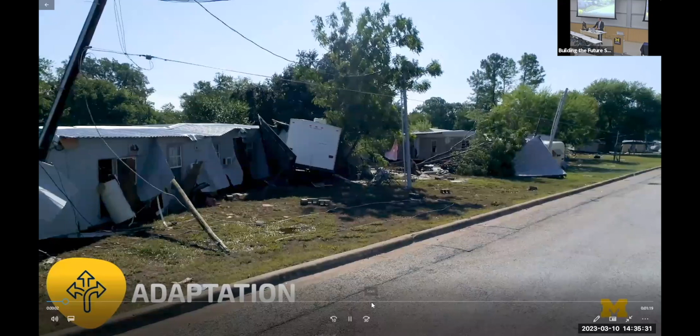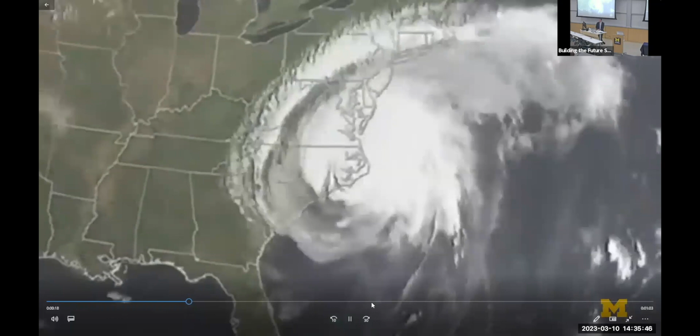Adaptation is a necessary thing for survival. We're dealing with many things that are affecting our life. Climate change is essentially raising sea levels, and that's going to affect coastal communities. It will cause more severe storms, more severe hurricanes, and tornadoes that are becoming increasingly frequent and increasingly destructive. We are looking at how extreme events like hurricanes and earthquakes affect communities, and how these communities can recover quickly from these different types of events.

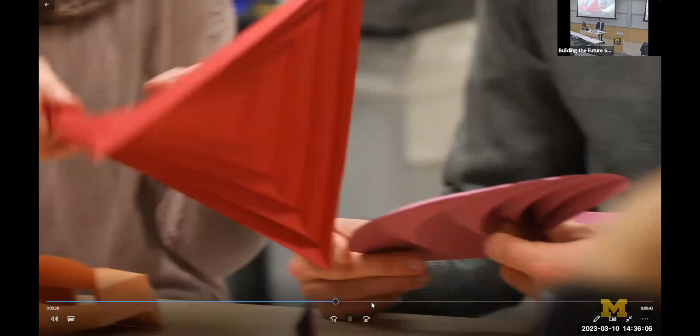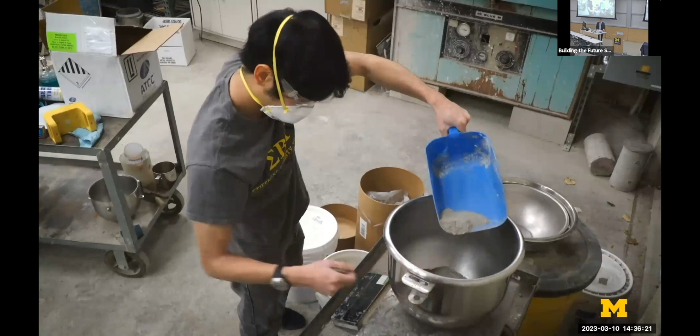My colleague Evgeny Filipov is looking at how origami can help us design structures that change shape, that respond to various types of hazards as they occur. My colleague Valery Ivanov is looking in the Amazon at how trees interact together and how they grow within that environment. My work is focused a lot on earthquake engineering. If we do not build our structures to be resistant to earthquakes, we are going to get structures that would fail in a catastrophic manner.

We will always be adapting to new stressors that will appear on the horizon. We just don't know what they are yet. Through human ingenuity, we will always be able to adapt to whatever situation exists.

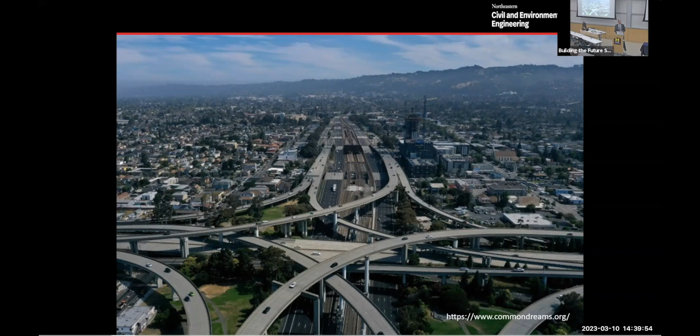It's a time when we're looking at the types of decisions we've made over the years in civil and structural engineering, starting to think about social equity, social justice, and whole new ways of framing our decisions and their impact on our designs. We have 60% of the world living in fragile coastal communities that are increasingly affected by climate change, and as structural engineers, we're thinking increasingly and directly about the environment and its influence on our designs.

Some of this has been captured by the American Society of Civil Engineers in their recent Future World Vision, led by Jerry Buckwalter. He said, change is coming, and it's on a scale that can really drive confusion and dysfunction unless our profession is ready to address these new realities head on.

But it's an exciting time. You could see some of the topics that the Future World Vision addresses related to smart cities, high-tech construction, advanced materials—so much of this starting to influence how we think.

I've been able to go to Kobe, Japan over the years several times. It's a beautiful city in central Japan, which along with Kyoto and Osaka forms a triumvirate of cities that are an economic hub. Kobe is one of the most important cities in the history of Japan. When I go, I stay at the Portopia Hotel and can overlook the port facility and see the activity.

However, the city was highly impacted in January 1995 by the Kobe earthquake. This was an earthquake on the high side of a moderate earthquake, certainly not the big one, but fire raged throughout the city from gas explosions. Japan is perhaps the most seismically prepared country in the world, yet they had some significant collapses in their buildings. Transportation infrastructure was heavily impacted, but most importantly, the port facility was basically wiped out by the earthquake.

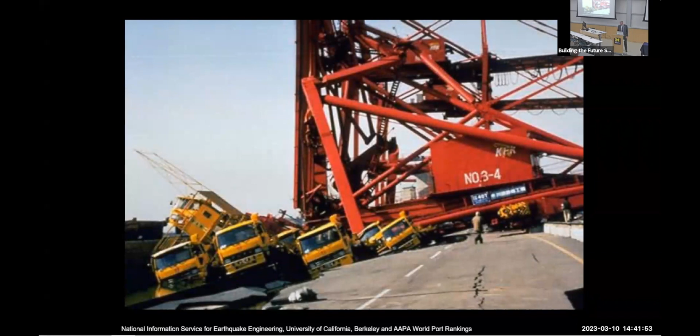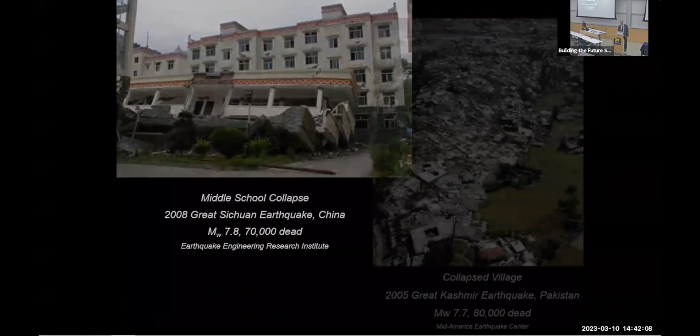And of course, we see this over and over again: 2008 in China, 70,000 dead; 2005 in Pakistan, whole villages leveled to the ground; 1976 in China, hundreds of thousands dead, often from lightly reinforced concrete and masonry.

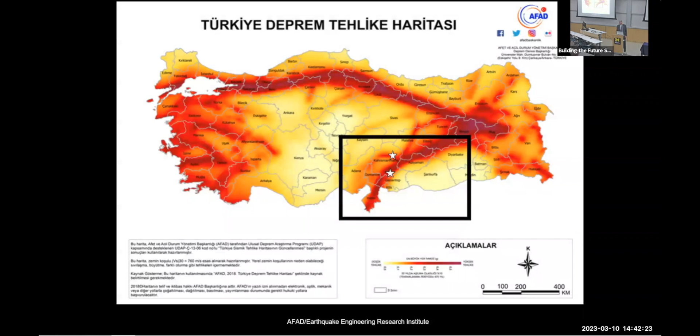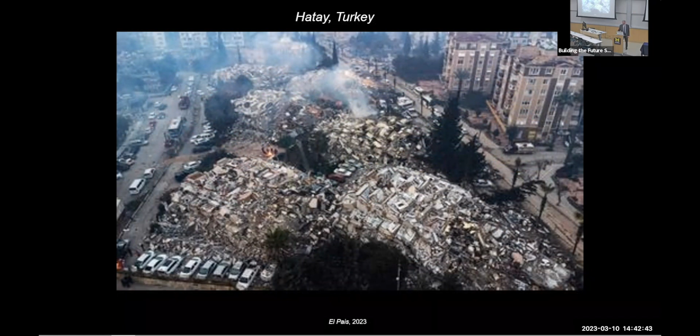But these are not just issues of the past. Just a few weeks ago, the East Anatolian Fault in Turkey had several ruptures. We're seeing here not only the impact of vulnerabilities from lightly reinforced concrete and masonry, but also the impact of corruption that can occur in our profession. We'd like to think it doesn't occur much in the United States, but if we look at what's happening around the world, we still have a long way to go.

Japan is so well prepared, and yet you look at 2011 with the impact of the tsunami on the Fukushima nuclear power plant, and that whole region is still struggling to recover.

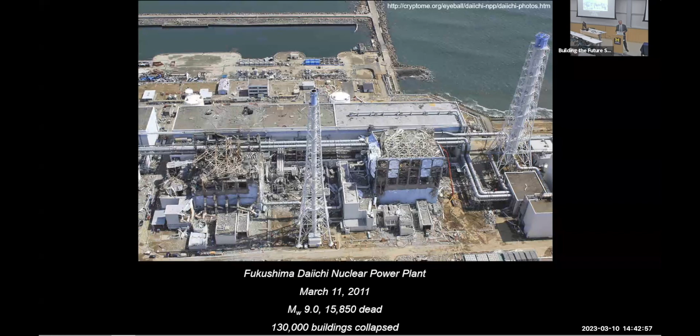In the structural engineering world, we have a term called disproportionate collapse, where we speak about damage or collapse that occurs to our structures disproportionately to the amount of load. This was perhaps first discussed with the Ronan Point collapse due to a gas explosion, as we see here.

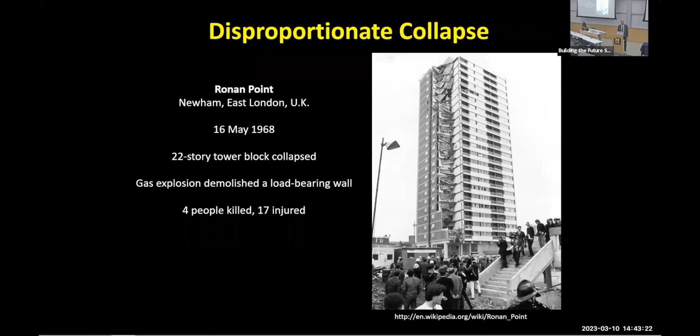But the term really wasn't thought about too much for several decades until 9/11. I think most engineers would agree that the collapses here were not disproportionate to the loads. But increasingly, we started thinking much more directly about collapse simulation, modeling collapse, and thinking about the impact of collapse on whole regions.

You can also talk about disproportionate collapse of a region, and Hurricane Katrina in 2005 provides a clear example, where the failures that occurred in the levees wiped out whole populations and neighborhoods in New Orleans that really still have not recovered adequately.

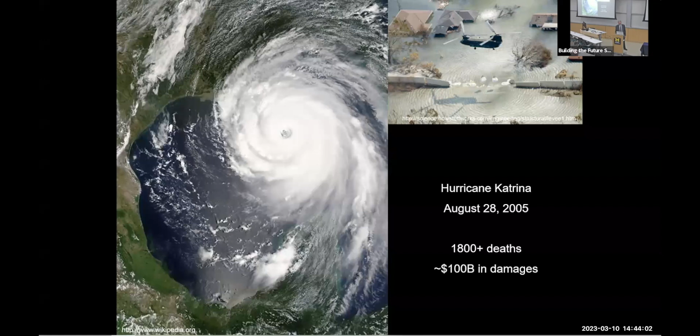Kobe was the 6th largest port in the world at the time of the 1995 earthquake, and I visited over the years following that, and it still struggled to recover. A lot of the shipping lines at that port, which was largely a through port, redirected to other ports and formed new relationships. Much of that economy never came back.

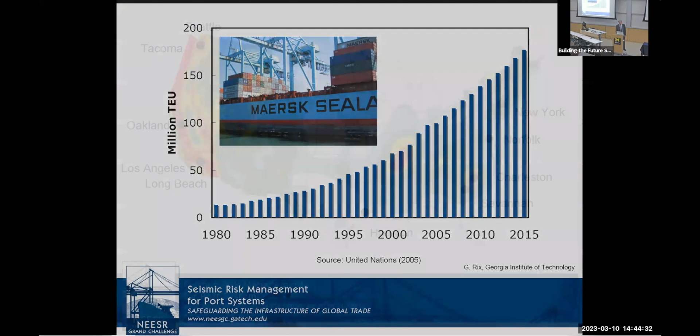This is not just impacting the rest of the world. High seismic zones and high hurricane zones in this country still have vulnerabilities, certainly out on the West Coast. Just last week, the president of the Earthquake Engineering Research Institute, with support from other professional organizations, went to the governor of California and pointed out clearly that the types of failures we saw a few weeks ago in Turkey can absolutely still happen in California.

They've been making great progress retrofitting schools, hospitals, bridges, and other critical facilities. Some cities or counties have laws on the books to try to upgrade privately owned structures like apartment buildings and such, but it's taking decades and we have a long way to go. These vulnerabilities are still there.

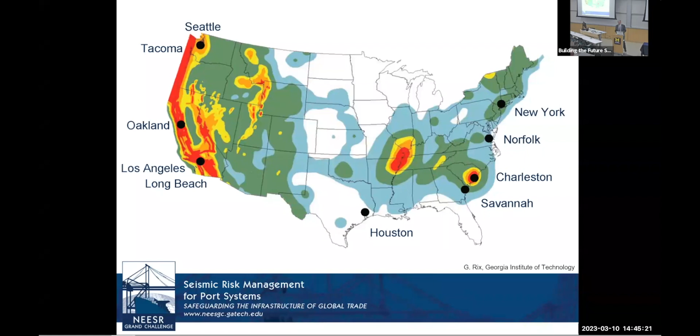So Kobe was a through port. What do we do with a port like Los Angeles and Long Beach? This is a destination port for a huge amount of the goods that come into the United States. If we have a major earthquake in Southern California, the impact on this country can be lasting for a long time.

We saw something like Superstorm Sandy, which hit New York and New Jersey quite hard, and the recovery was fairly quick. But I think we need to step back and ask ourselves, what does it mean to be resilient? How do we develop systems that can bounce back quickly from extreme events?

Simultaneously, I think we have an imperative to really be leaders driving sustainability in the built environment. Construction and use of buildings takes about 40% of all energy use, about 40% of all material resource consumption, about 40% of all waste production, and about 40% of all greenhouse gases. The transportation sector accounts for another 30% of energy use, and the industry sector the remaining 30%.

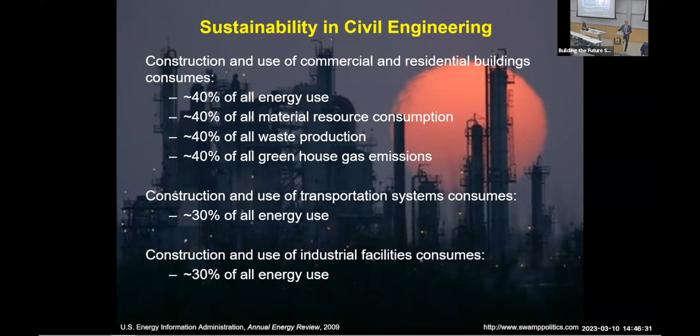So civil engineering certainly has a huge role to play, and I'd like to see us right out front on this topic. We have a long way to go. I think the way in which we're designing now, I call unsustainable engineering.

This is a diagram from my friend David Mar. For those who are not structural engineers, the way in which we absorb the energy from an earthquake or a hurricane, for example, is by having material damage, largely in our primary structural components. We have yielding of steel, crushing of concrete in the steel columns, in the girders, in the braces. We design ideally not to collapse, except perhaps in the most extreme loads, but we don't design not to be damaged.

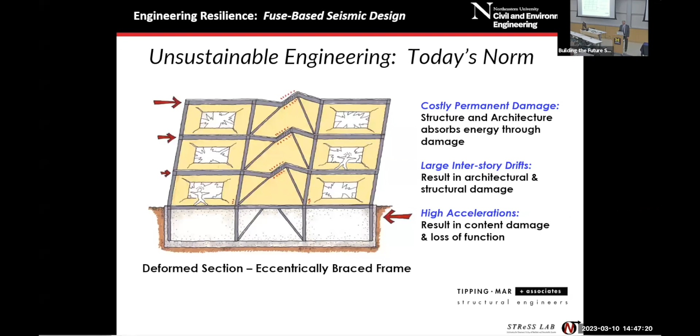You could have a brand new structure designed to code, and if you have an extreme event, it might be so damaged that it has to be condemned. We put this under the category of assessing risk and having reasonable risk, but I think we can do better. And I'd like to talk about a few solutions I've been looking at over the years to address some of these topics.

One that goes back a number of years, with Greg Deierlein, Helmut Krawinkler, and Sarah Billington at Stanford, we call a controlled rocking system. It provides an example of a number of different kinds of systems that have now been developed over the years.

This one takes two steel frames, and there's three components to the system. First, we put it in a trough to allow it to rock free from the foundation. Then we use that motion to engage replaceable energy dissipating fuses, I call them, like the old fuses in your basement. These are the gold plates.

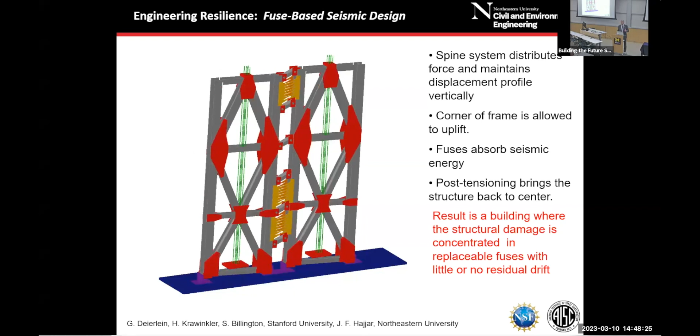These are standard steel plates with diamond shaped cutouts. We call them butterfly fuses. Once you put those diamond shapes in there, they can deform 30 or 40% of their original dimension without fracturing prematurely. The third component is in green, the vertical post-tensioning, which snaps the system back to vertical. Then you can pop out the old fuse, pop in the new fuse, ready to go again.

So we tested this in a number of different ways, quasi-static tests and such, but we culminated with some shake table tests at E-Defense, the largest shake table in the world outside of Kobe. This is one reason I was going there.

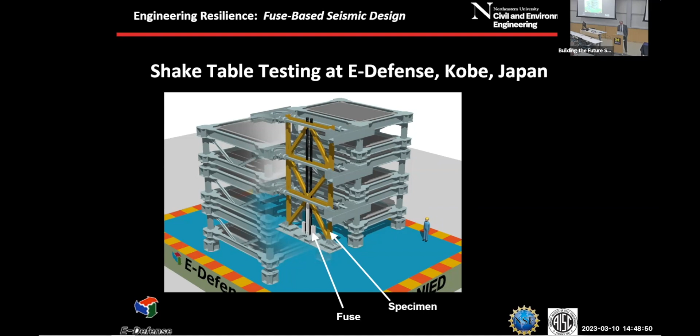A little different configuration here with a single frame with a white post. As the frame rocks back and forth, the white post goes up and down and engages the fuse at the bottom center.

You can see a photograph here with the specimen being put into place, the specimen in gold. This is being slid through, in gray, some large masses on linear sliders that will shake when the shake table shakes and throw the inertial force into the specimen. On the right, you can see a person to get an idea for scale.

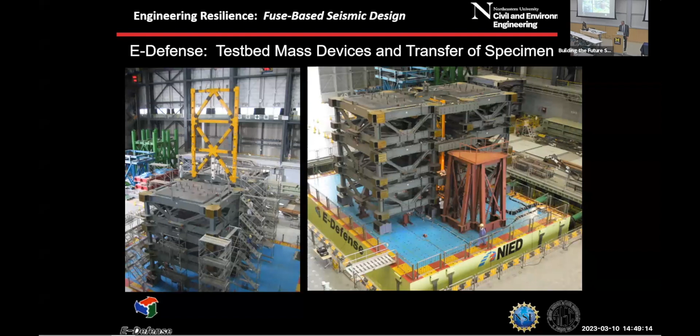This video will show a large earthquake that we subjected this system to. On the lower right, you'll see the linear sliders, the masses sliding relative to one another. On the upper half, two bays rocking back and forth. And then on the lower left, fuse in action here with the post tensioning.

The system is very robust. Oftentimes, you might not even need to replace the fuse. And of course, the idea here is that the rest of the frame stays damage free.

If you look at typical results, this shows basically load versus deformation. Full hysteretic loops, as we call them, show the energy dissipation from the system, but then it all comes back to zero as it self-centers.

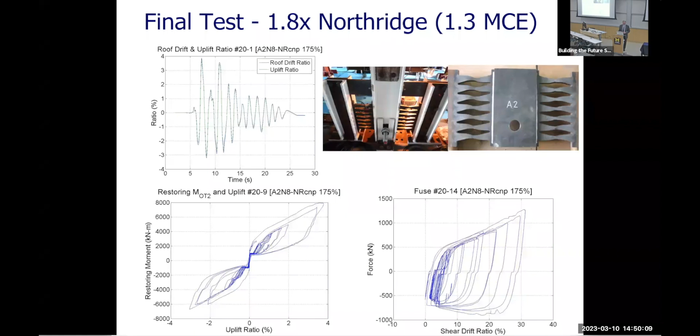These types of systems deflect about the same amount as current seismic force resisting systems that we use. And through the self-centering, if you detail the rest of the connections in the structure, you could self-center this whole system.

So we've been working for some years to determine how to get this best into the building codes. It's really a whole new approach because we have stiff elastic spines versus failing on a story-by-story basis. So it's going to take some work. There have been some early adopters.

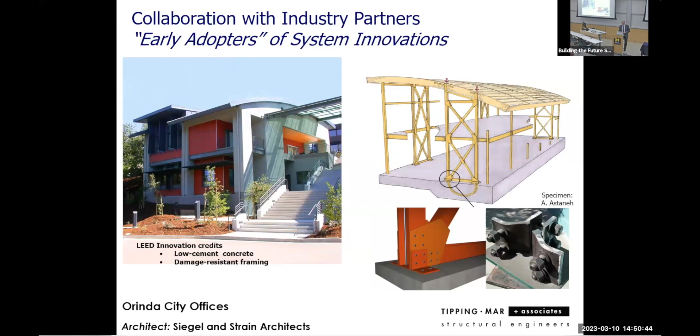For example, the Orinda City, California offices, David Mar, had his replaceable fuses be deformable angles down at the base, like you see here. And then you could see the post tensioning going up the inside of the column. And then you could detail the connections to be able to handle the rocking motion through slotted connections or perhaps pin connections like we have at the top here.

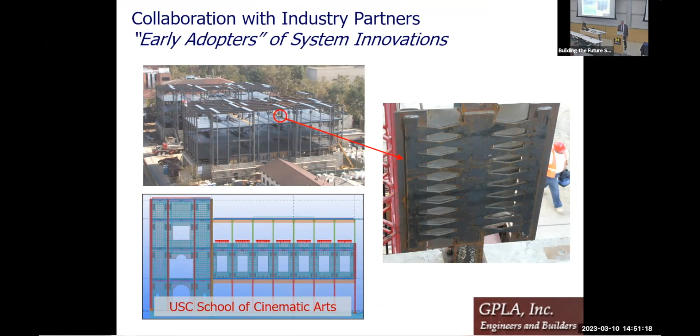Luth used the butterfly fuses in the USC School of Cinematic Arts, here using precast concrete planks instead of the steel brace frames, again, keeping those damage free.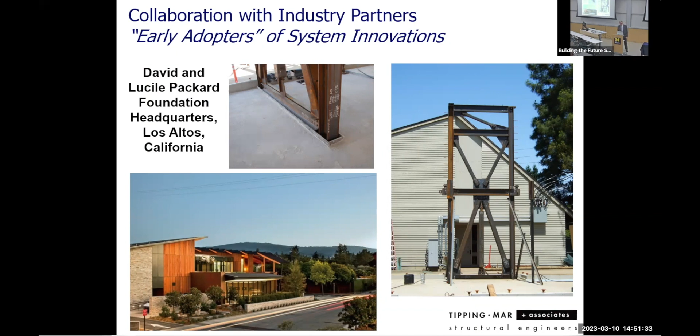Configuration very much like E-Defense, but here with a buckling restrained brace for the post. And as I said, there's been a variety of different solutions over the years. This is for the David and Lucile Packard Foundation headquarters. Tesla Gigafactory in Reno, Nevada, using this system.

We've been starting to map this onto different kinds of structural systems. For example, Jim LaFave and Larry Fahnestock and I at University of Illinois looked at standard elastomeric bridge bearings that are there to have temperature control. We put these through high seismic motions for a mid-America earthquake, and we could start to see that you can isolate the superstructure of the bridge, isolate the substructure, and have these systems greatly reduce the amount of damage.

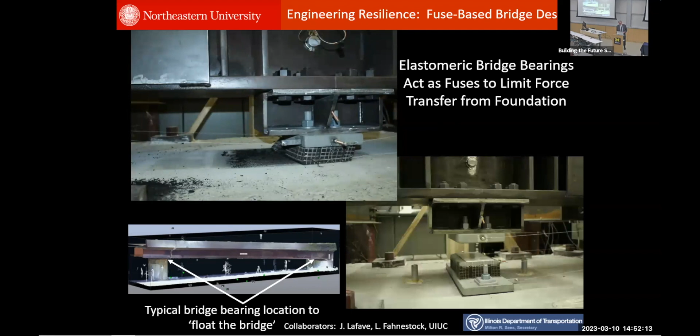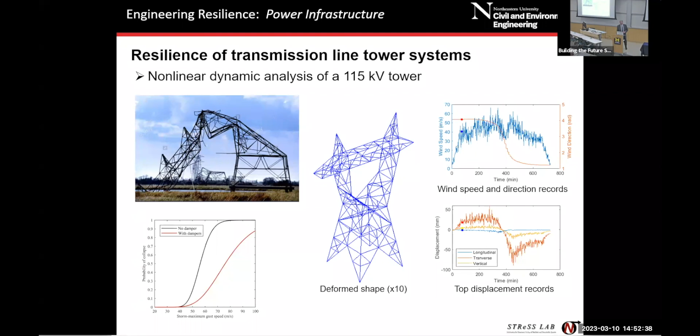Similarly, in recent years, we've been looking at hurricanes and doing some fully nonlinear analyses on transmission line towers for a complete hurricane, many hours worth of loading. And then looking at the difference as seen on the lower left in the fragility curve, having different types of solutions here to try to make this system more resilient. So we avoid the types of collapses we're going to be seeing in extreme events, like in the photograph.

Simultaneously mapping onto these systems approaches that can be more sustainable. I'm pleased to see all the activity increasingly going on in our profession. I'm a big supporter of SE 2050, which is a movement to get structural engineering firms to commit towards educating their engineers on these topics, reporting on sustainability metrics of their structures, and moving towards net zero embodied carbon.

If we look at our typical construction materials, concrete is largely downcycled right now, about 20% of it recycled. Timber is very hot among the student body nationally, structural engineering students going crazy over timber. About 60% of it right now going to the landfill. I hope we can come up with new solutions that could do better than that.

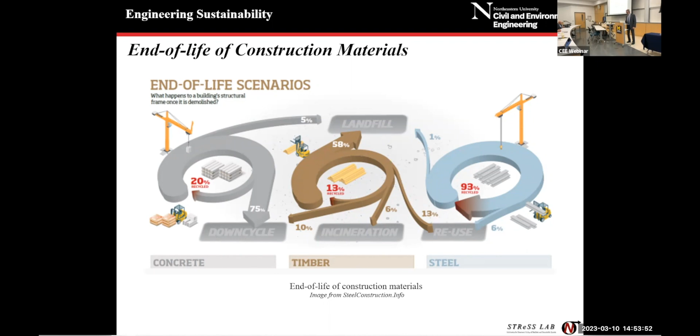But steel is a fantastic material. Comes just about from 100% recycled material now, and about 100% of it goes back to being recycled. And increasingly, as we might hear from our panelists, using renewable energy for the creation of the steel. Lots of opportunity there. So one project we've been working on in recent years is Design for Deconstruction, funded by AISC and the National Science Foundation.

Working on this with Mark Webster at Simpson, Gumpertz and Heger. And here we're looking at replacing a cast-in-place concrete floor with precast concrete planks that you can clamp to the top flange of a building floor system of a steel beam to achieve composite action.

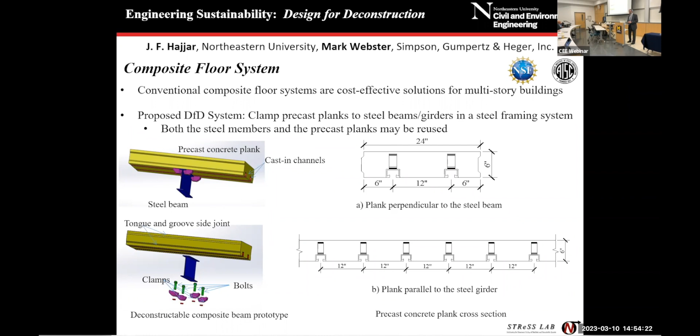And we envision this being in a floor plate with this jigsaw pattern of these precast planks. They can come in different widths, different lengths, and we envision them being stockpiled both as new planks and steel beams, and then disassembled and stockpiled for reuse after the life of the building has been achieved.

Oftentimes buildings are taken down because owners don't want them anymore. They haven't been subjected to extreme events. There's a lot of opportunity here. We see this in use with all bolted steel construction, so you can take the whole system apart. This is already starting to happen in Europe.

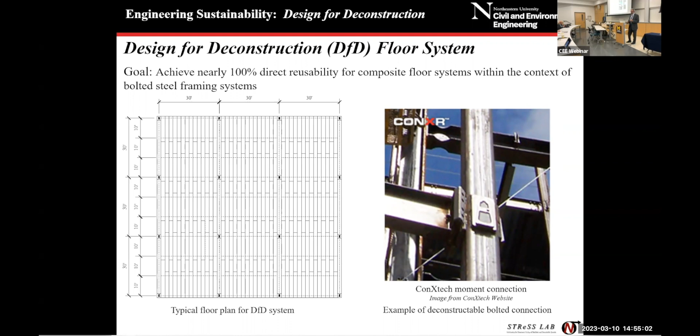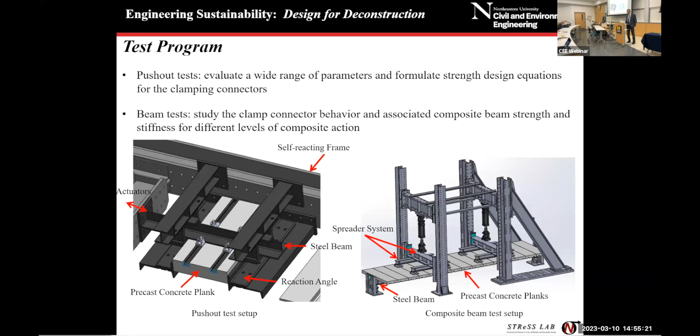We ran a series of tests to document the strength of these systems, push-out tests like on the lower left, where we're pushing the steel beam past the concrete plank so we understand the shear strength on the clamps. And then on the right, a full-scale beam subjected to gravity load so we can see the composite action.

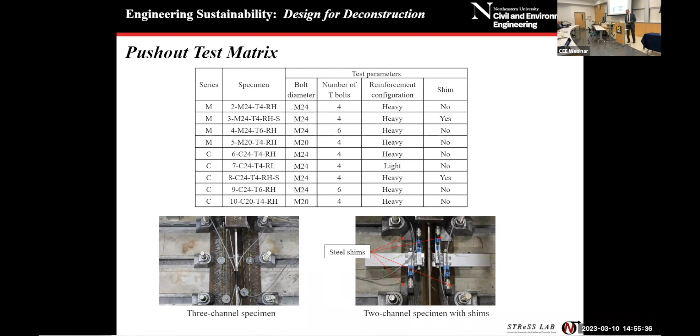For the push-out tests, we ran a whole series: monotonic loading, cyclic loading to get ready for high seismic applications, and different numbers of clamps. Suffice to say, the clamps work beautifully and they can hold their strength, or near peak strength, for very large deformations. It's essentially a damage-free form of force transfer.

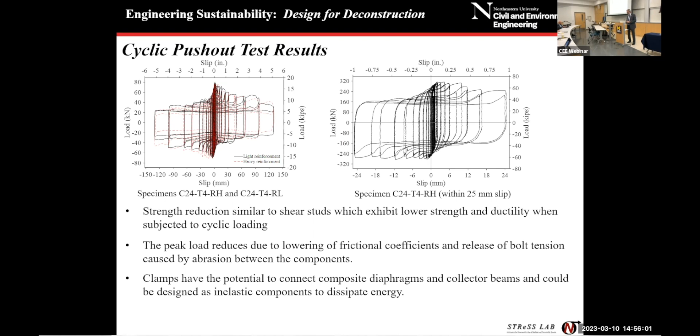Of course, engineers are pretty nervous using friction as a force transfer mechanism. I understand that. But I think in a controlled configuration, such as a gravity beam, there's a lot of opportunity here.

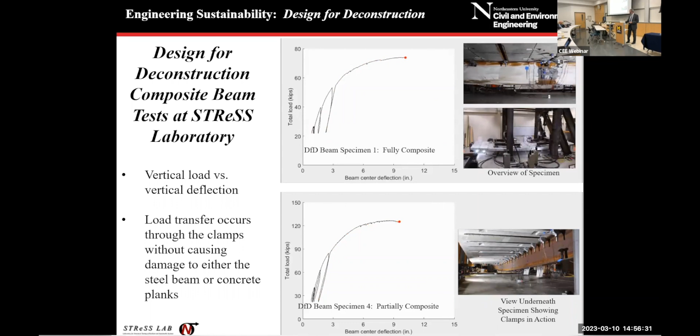So we think the system has a lot of promise. If you calculate estimated design strengths, for example using current design strategies from AISC for composite beams, these are achieving composite action as we would expect.

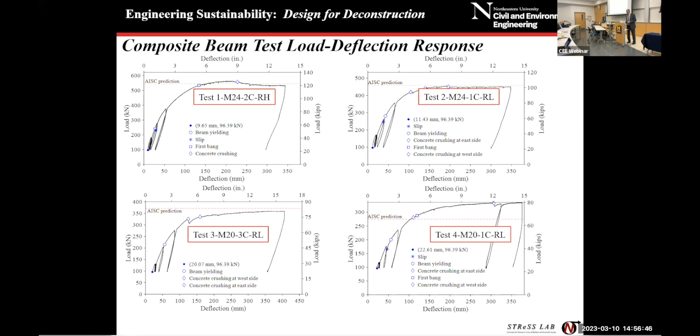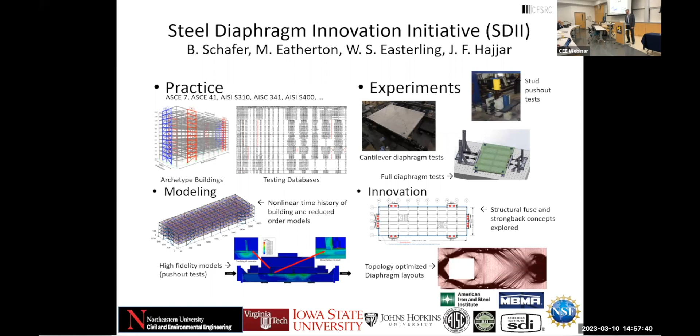We're looking especially at the three-dimensional behavior of steel building structures and the flow of forces that occurs during an earthquake in the floor diaphragms, composite steel deck floor diaphragms. We have surprisingly few design provisions on how to design the diaphragm; we leave this largely to the engineer's judgment right now. So this project was to try to advance that. We did a whole series of experiments and analyses and then recommendations for design. I'll show you one brief window into this.

The project culminated in a full-scale diaphragm test that we did at Northeastern. This diaphragm is about 30 feet long, about 20 feet wide, about 10 feet tall. We had a series of 4 in-plane actuators cycling this back and forth at the distribution of forces that a diaphragm would see in a large earthquake.

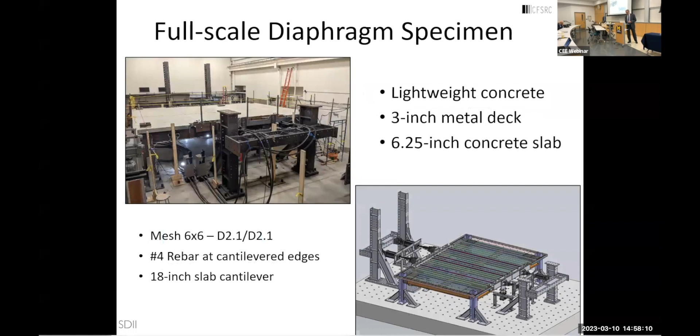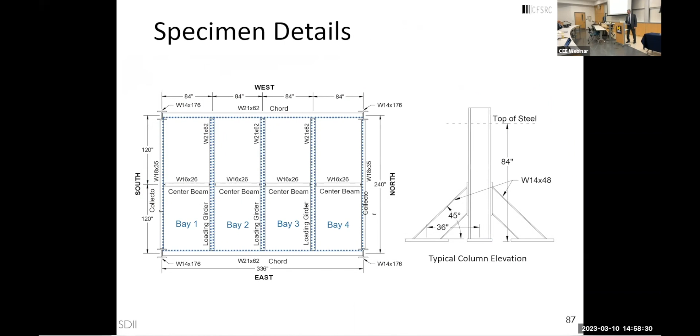This is a rare kind of specimen because it had indeterminate steel framing, with a number of steel framing members for the gravity system. The key beams are on the left and right, the south and the north, which we call collectors. These transfer most of the shear from the earthquake out of the diaphragm and down into the lateral system. We had a lot of instruments on here, with standard construction practices like we'd see in the field.

So there was a little bit of reinforcement around the perimeter, but otherwise not too much reinforcement in the concrete. This time lapse shows the results from the cyclic loading applied here. Most of the damage occurred on the outer 2 bays. We had 3 concrete pours because the slab was so large, we ordered the exact same mix design and got 3 pretty different mixes.

So for those of you in the concrete world, we still have some issues to address. The damage occurred mostly on the right side here, where the concrete was a bit weaker. However, the strength and stiffness of the diaphragm was huge, and overall this performed really well. I think we can have faith in our current floor systems and a better understanding of how they work. But with respect to resilience, if you get cracking like this or crushing like we see on the right, I have to ask: is this really the best we can do?

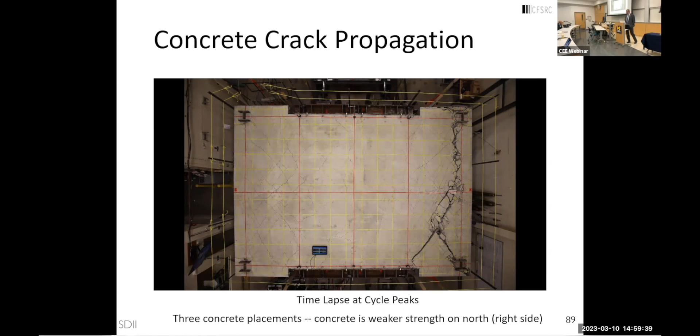Get a sense for the load hysteresis, load deformation hysteresis here, well above predicted design strengths, holding the load for quite extensive deflections. So this has led to the last couple projects I want to talk about.

These are just starting off. The first one is called Fast Floor, looking at the behavior of modular steel plate floor assemblies. This was done with the same team as SDII, along with Onur Avci at West Virginia University. It's part of the AISC Need for Speed initiative, funded by the Pankow Foundation, AISC, Nucor, and other organizations. We're looking at developing an all-steel structural system, in particular a steel floor plate system with no concrete in the floor for standard steel buildings. Not only are we looking at removing the concrete, but having a modular system that could be much faster to construct, and potentially could make this deconstructible.

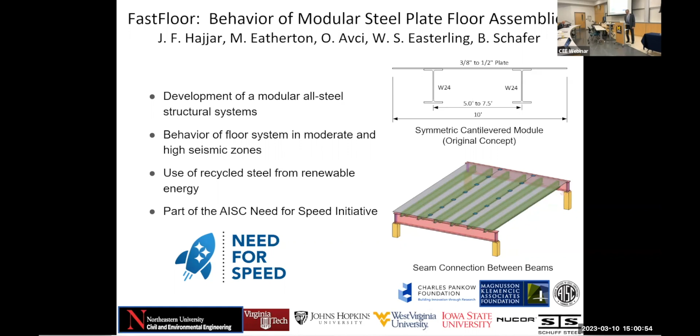Looking at recycled steel, increasingly from renewable energy, we can achieve a lot of different objectives with a system like this. We're looking at having two beams, a 10-foot wide plate that is asymmetric, so the edge of the plate would drop down on the neighboring beam. In this system, a typical module might be 40 feet long.

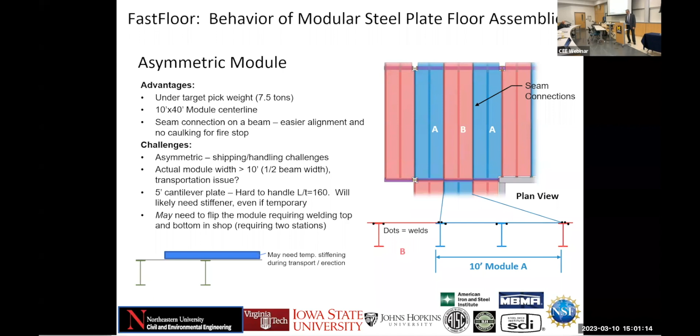This video from Clark Construction compares the potential for fast floor construction with typical construction on the right. On the right side, putting in the steel framing, laying down the metal deck, pouring the concrete. On the left side, popping in the fast floor modules. The savings that this construction company and others we've interacted with are predicting can be quite substantial - this means cost savings, potentially material savings, and perhaps most importantly, eliminating the concrete. So the fast floor system is finished here, and on the right they haven't quite gotten to pouring the concrete yet. I think you get the idea.

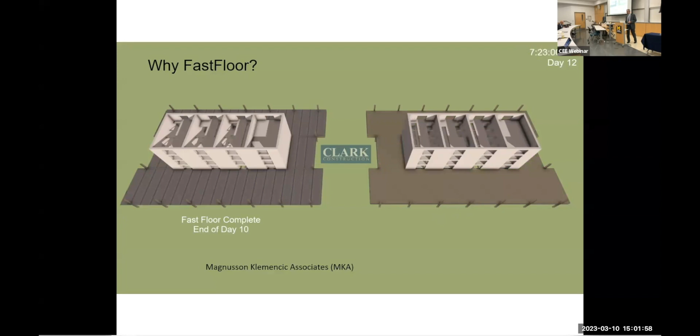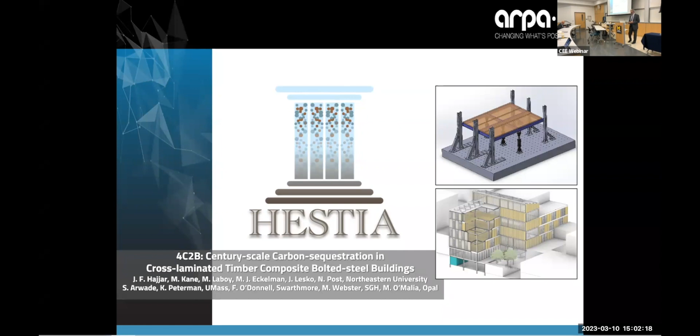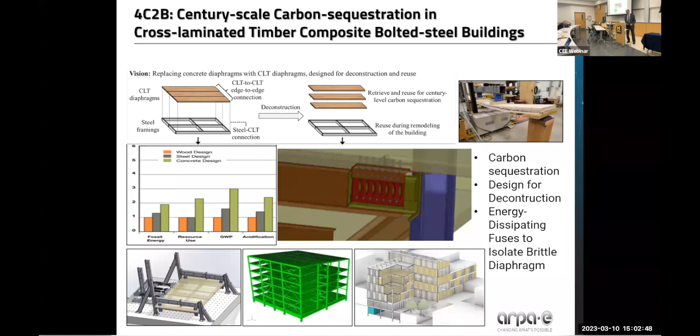The other project from Department of Energy is looking at cross-laminated timber floor diaphragms in steel building structures. We have a large team at Northeastern, along with folks at UMass Amherst, Swarthmore, Simpson Gumpertz & Heger, and Opal. Both of these projects are for seismic engineering. In this one, we're pulling together a lot of the ideas I've talked about: design for deconstruction, using the cross-laminated timber diaphragms. I'd like to see if we could isolate these relatively brittle diaphragms from the lateral force resisting system with some butterfly fuses. We're going to be looking at advanced materials in the layers of the CLT diaphragms to address acoustics, vibrations, and fire. So that'll be work moving forward.

Now, a lot of you are probably familiar with LEED. Many buildings now design with LEED to try to achieve better sustainability. I'm not quite sure LEED is doing everything that we would like, but at least everybody is talking about it, designing with it, understanding it.

The U.S. Resiliency Council out of the West Coast is trying to do the same thing with resiliency, where they've established a silver, gold, and platinum rating system so that in addition to rating your structures for sustainability, now you can rate them for resilience. Sustainability is certainly critically important moving forward, but as an owner and an occupant, resiliency is the real deal. Understanding whether your structure is going to come back quickly after an extreme event is increasingly important, so that unlike the Goldman Sachs headquarters, which was an island of resilience planning amid a sea of darkness after Superstorm Sandy in Manhattan, we could start to do better.

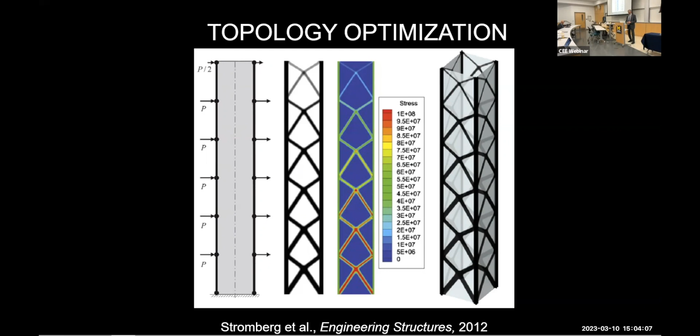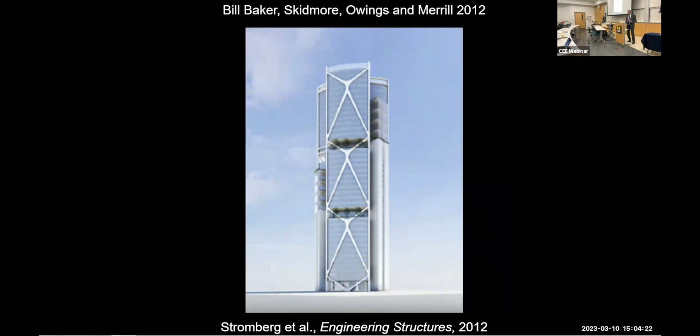A few years ago, I had one of my postdocs and I did a little bit of work in topology optimization, which is an approach where you represent, for example, a building with a mass and apply loads to it, and then it tells you how to redistribute the material to address those loads in an optimal manner. A number of structural engineers out there are using this increasingly in some of their designs, and these provide shapes that are very organic and really just feel right. They're very efficient, and in fact some of these shapes have been around for a long time.

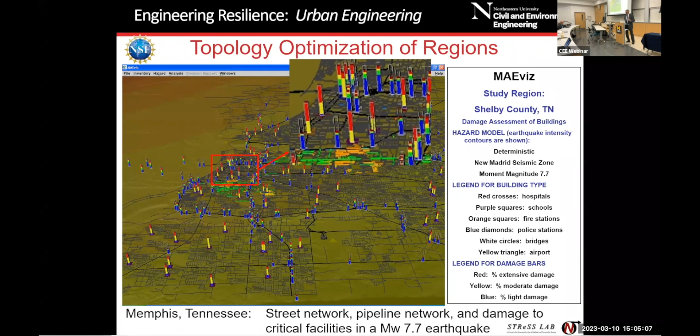I'd like to increasingly pull a lot of these ideas together, for example to think about topology optimization of regions. Increasingly, as we design individual structures, thinking about the communities in which they're being put and the impact of their performance on those communities. With respect to sustainability, I think this is going to require a culture shift. Whereas engineers, owners, and the general public - if we design something and put it out there that's not sustainable, it feels ugly, and if it's not resilient, it feels dangerous. So I hope you all will join me in trying to shift the profession more strongly in these directions.

Thank you very much.